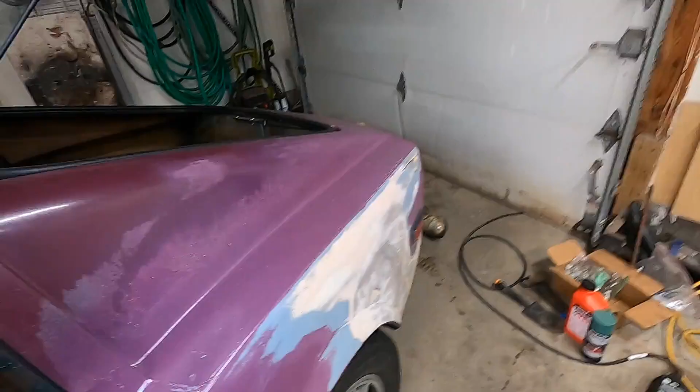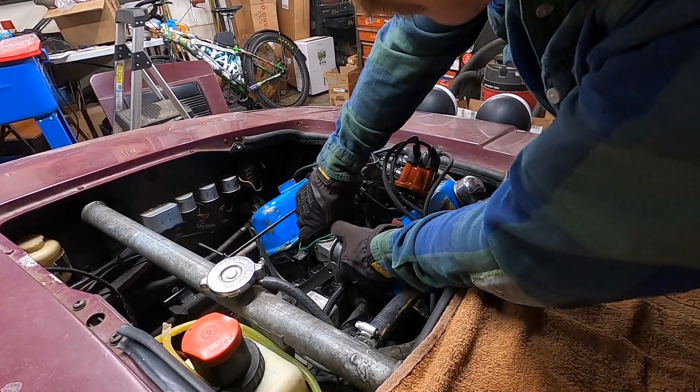Well, I'll start in the engine bay. Dad is going to replace these drain tubes that drain out of the channel in the rear window, and those are kind of plugged up right now. They come out here. He has some small engine fuel line we're going to install with little clips on it, and hopefully that will drain out of here properly instead of dripping over the edge. And it'll give me a little space to work up here because this engine bay is pretty small.

The shop installed a set of spark plug wires that do not fit. But if it runs, I guess.

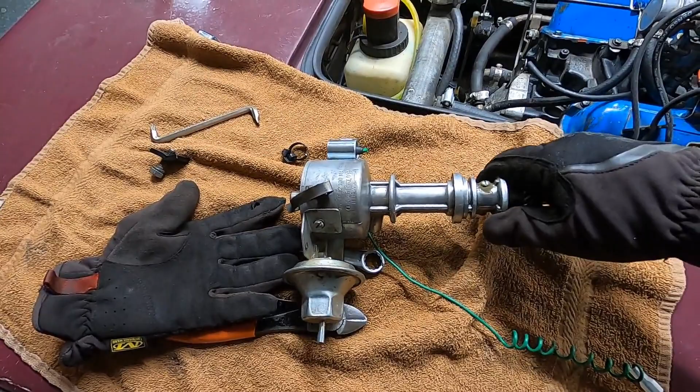To me, this distributor looks fine. It's a Bosch unit, I got it rebuilt. There is this little ground strap in here that I'm wondering if that might be an issue. I thought we checked that. I thought we checked all of this stuff.

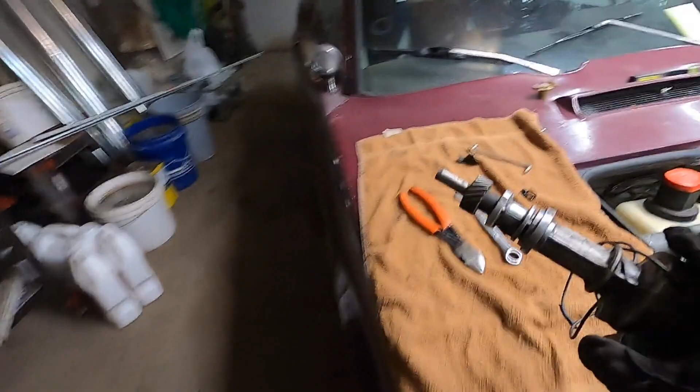The shop was saying there might be some play. I don't know if it's the up and down play they're nervous about or side to side. There's a slight amount of side to side play. So maybe one of those bushings is not quite what it should be. But we'll take this, set it aside for now.

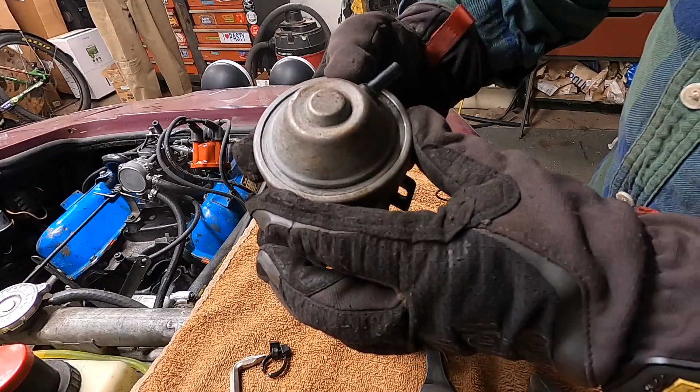And here is our $25 replacement. The gentleman who sold this to me showed me a video of him testing this, putting it on a machine and showing that spark was coming out, so I have good reason to believe that it works. When we look inside this though, we have the broken ground strap here, and I'm not sure what to do with that. I'm assuming they tested this way, and we'll see if it will work.

So I'm going to install this vacuum canister. It just sticks in there, and the lever here goes over the E-clip, or under the E-clip. And I did check that it does make sounds and all that, so I think it's going to work.

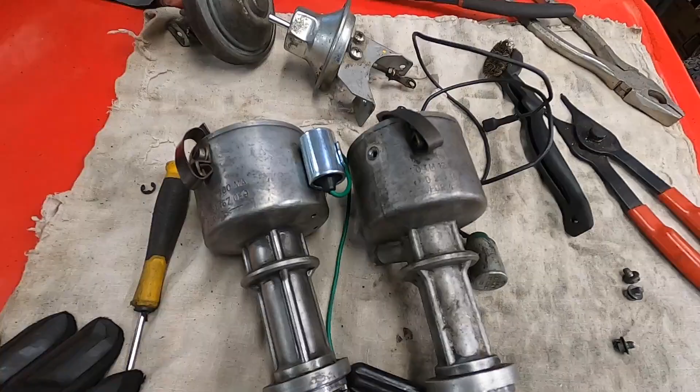Putting this thing together. So you got this out of the back of the car, and that's seam sealer that we put in to seal up the dust and sound. It's so hard to work in there, you can't even get in there. Did that break off in your hand? This broke off at where it exited the car because I was trying to pull it from the top. Wow, just pulled off from the bottom. It's fine.

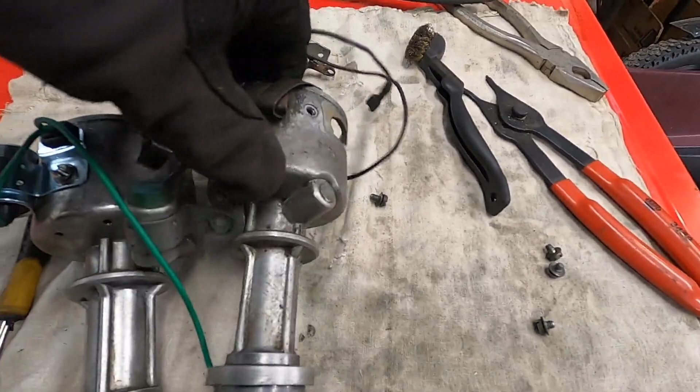So I'm looking at these, comparing that, man. They are actually the same exact part number, 0231167039. It has all the same markings on it. The difference is the condenser is a different style on this one than this. I like this condenser style a little bit because it is one piece, and this one takes a separate clip here to hold the plug in.

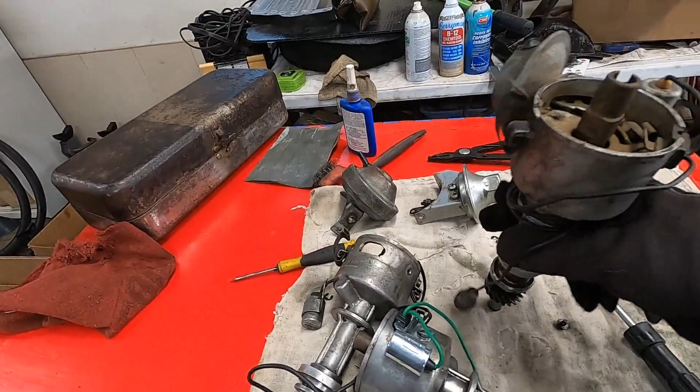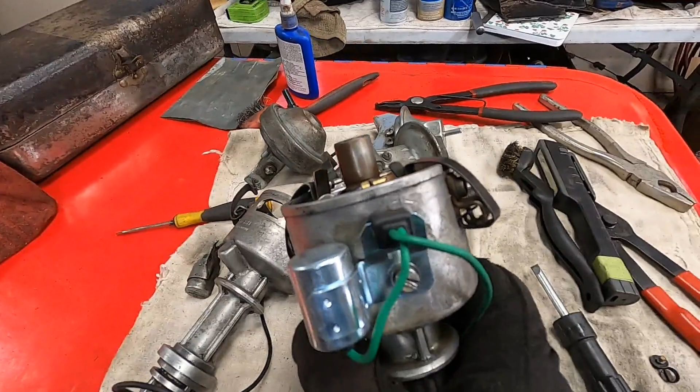They're multiplying. I pulled out the spare parts engine distributor, and I believe this is the original one for the car. You can see the condenser plug here goes in the top, cut into the side, and the cap goes over that. These other ones have it cut into a hole in the side - that's the difference. This style you can actually put Pertronix on if you want to.

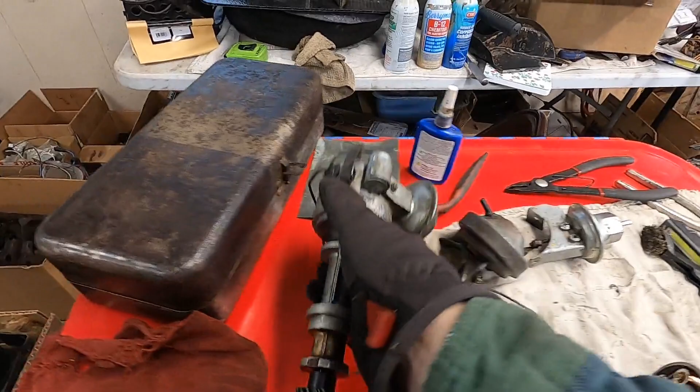I was looking at this because of that ground strap inside - we have a ground strap that's intact on this one, right on the bottom there. And this one, the ground strap is broken and flying in the breeze. That's not ideal. I thought maybe this one would have one, but no, that one is missing altogether, just gone. That's one of the main reasons I didn't use this as a test distributor - I don't know if it works, and I don't want to rebuild it just to see if it works.

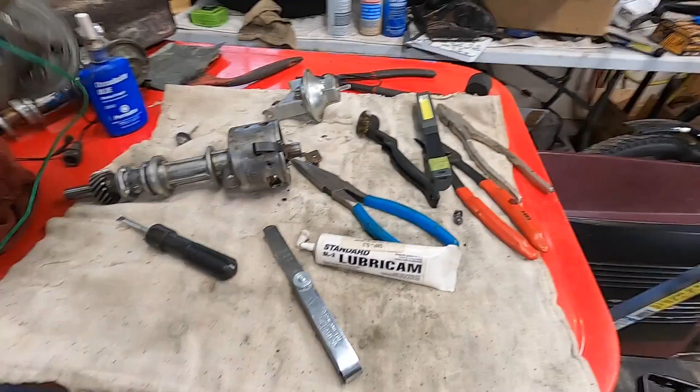So unfortunately that's kind of what I'm doing to this one. I made the decision I'm going to put on this old Advance that came with it. I'm not going to worry about updating the Advance, I'm just going to throw it on, probably throw this new condenser on it since it's the same distributor. It should fit perfectly, and we'll see if the engine runs on static timing first.

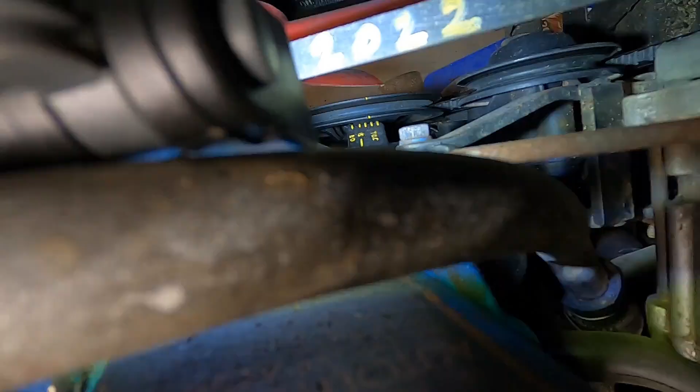All right, got her all assembled up. Got the points gap to 16 thou like in the book. Got some lube on the cam up there so it doesn't wear my points out immediately. I think we're good to put this in the car. We also had that new condenser put on - it's looking pretty good. Let's plug off that vacuum port there and throw it in the car.

Intake valve has been closed, our timing mark is at TDC. Of course, being at top dead center and putting this distributor in the right position is two different issues. You have to remember it's a V4 and the firing order is 1, 3, 4, 2, so it goes in a counterclockwise direction with the firing order, and on the distributor it goes in a clockwise direction as it runs.

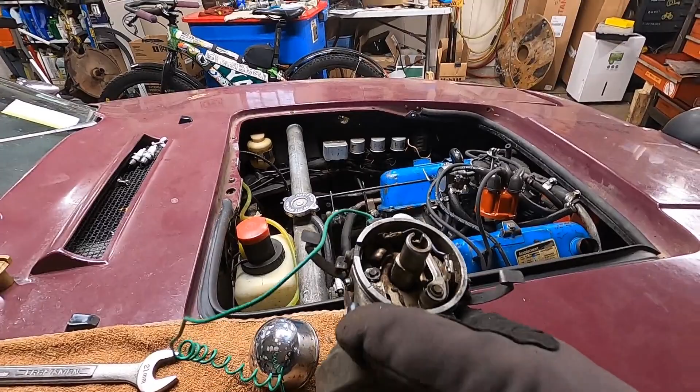If you look at the 4 posts on the top of the distributor cap, take the 2 on the passenger side and flip them side to side - that's which ones they go into in the head. Same here, if you take the 2 on this side and flip them side to side, that's the cylinders they go into. So we know that since number 1 is on the front, number 1 on the distributor will be on the back on the passenger side.

If we point our advance unit in the right direction, we'll see there's a little tick on the distributor body here, and that indicates number 1. It should get you pretty close - you'd have to put a timing light on it and get it dialed in for real.

As we put it in, the distributor shaft is going to try to turn counterclockwise to mesh with the helical cut gears. There's also that little oil pump driver in the bottom - it's going to want to line up with this, and that's a hex. So you can take a little quarter inch hex screwdriver and turn that if it doesn't go in the right way you're expecting. I'm going to try, see if it'll go in first and adjust if we need to.

Not going in. Still no. If you get it close, it should kind of pop in, but you got to get it close first. There we go - looks pretty good to me.

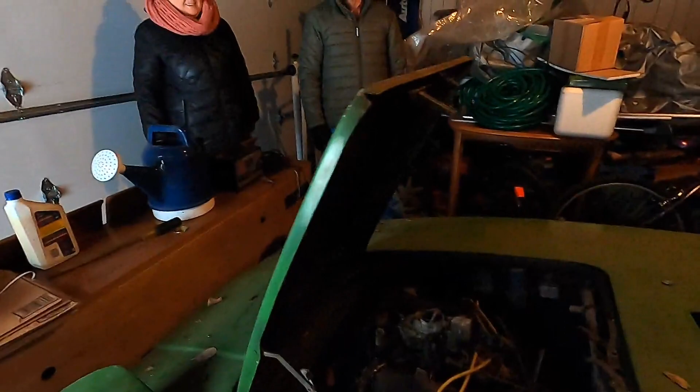So we're here at a fellow rally house, and we have a 1973 Saab Sonett that's been sitting since 1987, Kathy? Yeah, that was the last time it was registered. Her dad bought it brand new in 1973. This is very cool, it's got the SCCA Land O'Lakes stickers on the rear window. But we have a chassis that's Minnesota rusted. It's been a Minnesota car its whole life, and we have an engine here that has a distributor. I'm going to probably pull this distributor off. You might see this car in the future, but I don't think it's going to be on the road again because of the rust issues.

Anyway, we'll pull this distributor off, and hopefully this will work well enough to give us some spark and get out and drive ours. It's Sunday.

I have spent the entire day finalizing a road book for a TSD rally I'm running in a month, and I'm actually the rally master, so it's very fun.

And my dad has decided that he is going to work on the heater valve, because if we're going on a TSD next weekend, I'm not riding in this car with no heat. Neither am I. Because last year, what happened? The heater valve was stuck on, so it was heat no matter what. Well, it was below zero when we went down there, and there's so many gaps around the windows that the heater was blowing full blast, and we were still freezing. It did warm up to about 20 that day, and so it's comfortable when it's 20.

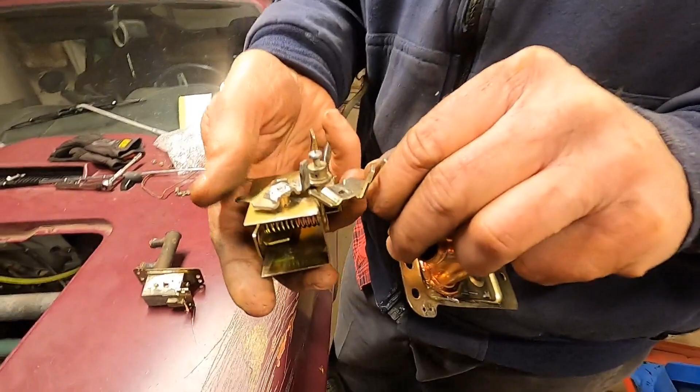The caveat is that because the heater valve was stuck on, that first year that I was driving this car, the heater was on 100% of the time, no matter if it was 80 degrees or not. So I would very much like to have a working heater valve and not have to physically disconnect it and plug it off every summer.

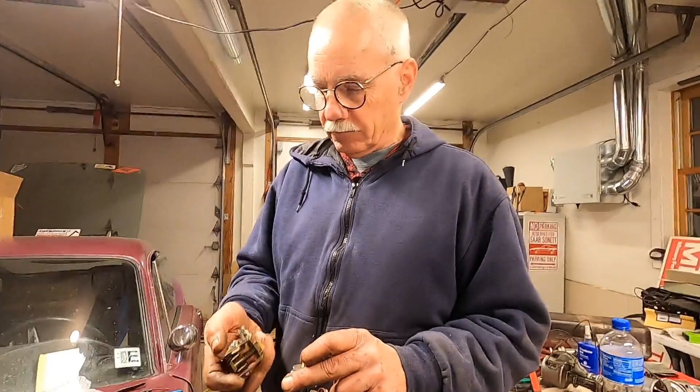So you got this part here. I thought this thing was going to be a direct swap. Well, it looks identical, but then I found out that this tab on the side of it here is a little bit different than the old one. What does this tab do? Well, the cable for the temperature goes in here and screws in. Okay, so that opens and closes the valve. Yeah. And so there was no way to hook that cable on here, and I really didn't feel like bending it and trying to get it in the right place. The cable. So I said, well, I think I can swap those two over.

So I got the new one off. I got the old one off. I put the old one on the new one, and then find out that the thing inside was backwards. So I got it all on and soldered, and it didn't work. So then I take it off again and do it again. But now it works.

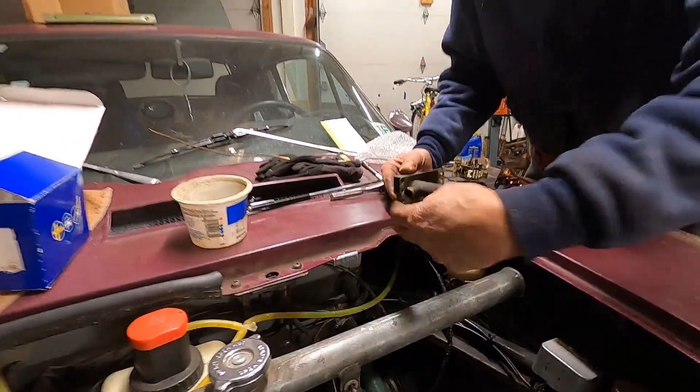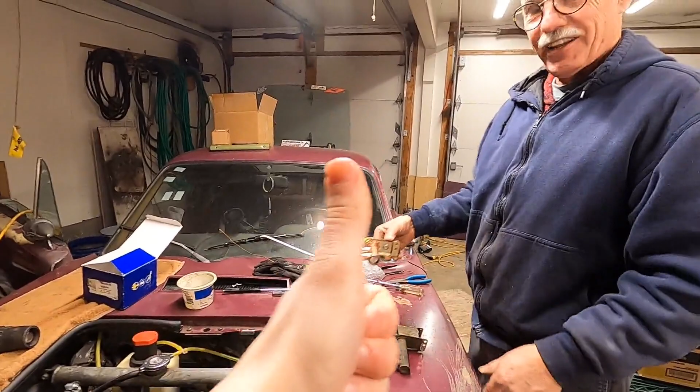So you got to thread the thermocouple up through a little hole up where the heater core is. Yeah, and it is not fun working in there because you can only get like one hand in there. So I get this valve all the way in, and I get it through the firewall, and it is not fitting right. What is going on? Why is it so tight? It normally fits in that hole in the firewall and hooks up to that elbow hose. So it's really hard to get to, right? Yeah, and it comes through like this, and then this hose hooks on there, and then the one from the engine hooks on the other one.

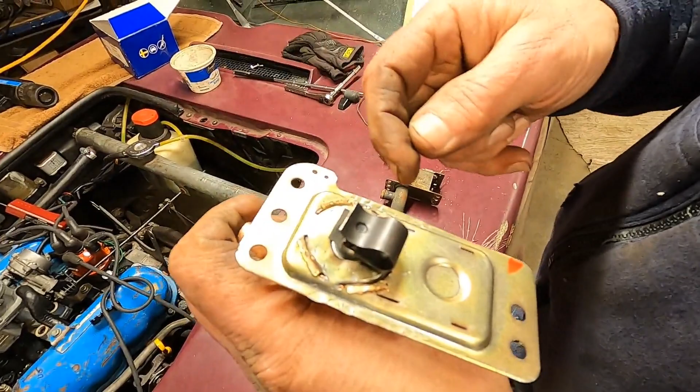What I didn't realize was, on the new one, these were turned up. So when I put it in, these were both pointing up and they were hitting on this cross member here. And they're supposed to hit sideways, but they were supposed to go in like this, right? And they came in like this. God, so then I'm going. And this is for a Volvo 142, by the way. This new one is for a Volvo, and the old one apparently - I figured that Saab would just buy the same part that Volvo bought, but no. So it is identical, they just spun this.

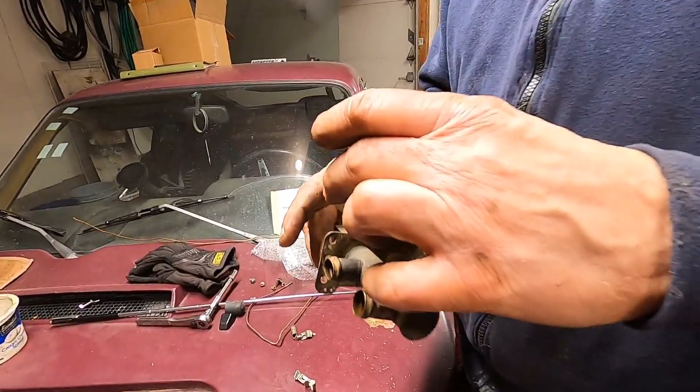So I had to bend these tabs up and pop this thing off. Let's see the tabs here. So there's holes, these tabs here. On the top? No, I'd bend these up here first. Okay, and pop this box off. And then I had to bend these tabs straight up. They're just copper, so they were easy to bend up. And you turn that 90 degrees?

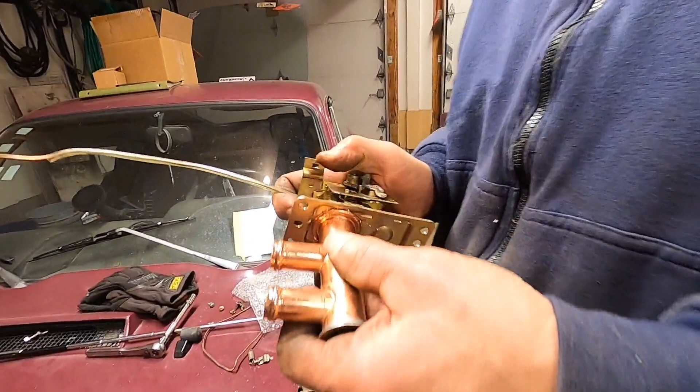And then I rotated 90 degrees, but of course it's not symmetrical, so I had to take a Dremel and cut more slots. Are you kidding me? God, I'm just not having a good day. I put it all together, but I put this thing on upside down, so I had to bend the tabs back over and flip it over. It's not going well. I should just quit and do this another day, but I want to get it on.

So now I got this on where it's supposed to be. It'll come through the firewall like this, and hook up to this hose, and then another hose off the engine, and then this is going back on here like this.

You haven't touched this, right? This is in the same orientation? Yeah, that's okay.

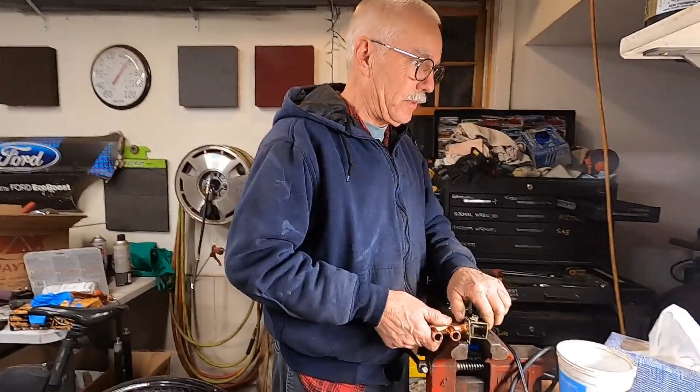I'm learning the app Rabbit Rally, it's a GPS-based road book and timing system for TSD rallies. It's pretty slick when you get it running, but it's my first time being a rally master, so I've been having a frustrating day. We ran with my rally chairman for about 6 hours, updating every single route instruction. I don't know the exact mileage, but it's probably around 100 to 150 miles of instructions.

So why did you have to do that? Did you put them in wrong? When we were turning from one road to the next, apparently the SCCA has a standard for where you take the mileage for a corner. I was taking the mileage at the start of the corner when you'd see the road sign, but what you're supposed to do is go through the corner and line up the driver door to the stop sign going out onto the intersection. So we measured all those incorrectly.

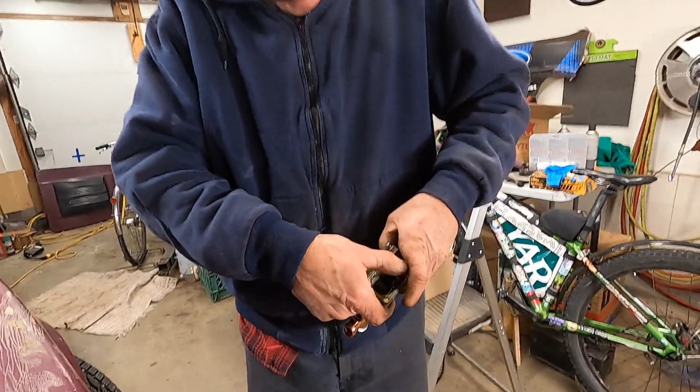Oh okay, alright let me get the old valve. I want to make sure I'm only doing this one more time. I almost had it in wrong, but I looked at the old one to make sure. So the only two things you really had to do were the little turny lever that holds onto the cable...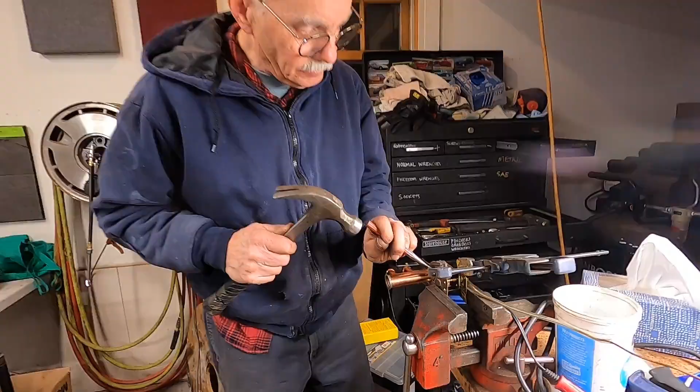And then you had to turn this thing 90, right? Yep, everything else is the same? Yep. And it appears, other than this lever, they're all the same parts. Okay, they just flipped them when they made them. So you're going to knock these tabs over again? Is that what you're doing? Mm-hmm, okay.

I started on this little project at 4 o'clock. What time is it now? 6:37.

Pop it off. This is some insulation or something? Yeah, that came on there. I'm going to leave it on there.

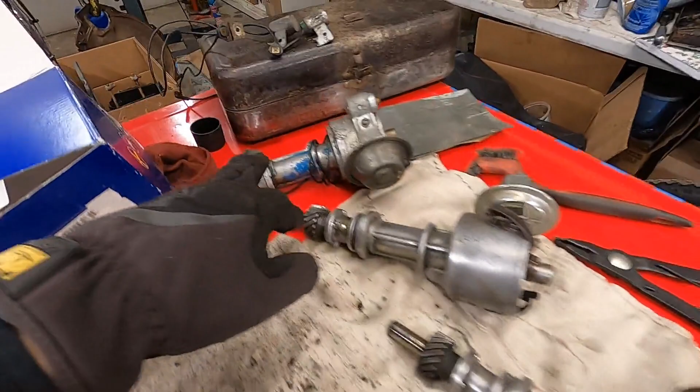So what do you think this thing does? I don't understand what a thermocouple does. Maybe the valve, when the engine's cold, it keeps the valve shut just a little bit. And then once it warms up, it probably opens the valve full. Does that make sense? Yeah. So the biggest problem is there's a wiring harness in the way.

That's lovely, right here.

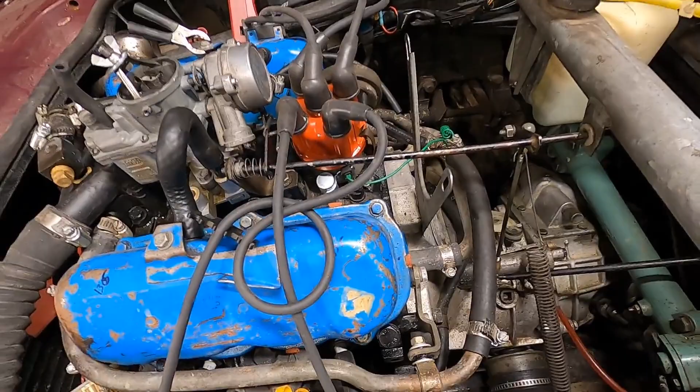Back to distributors. This is the one that was in the car that wouldn't work. This is the one I got for 25 bucks, and the ground strap is broken. This is the one from the parts spare engine, and this is missing a bunch of stuff including the ground. And this one is the one that we got in the spare, the green car. So we're going to see if this works. I did clean the points, and I checked the gap, and it seems to be within spec.

Neutral, okay. Battery on. Timing light's on, okay. Wipers off. Left side, there we go. Okay, go ahead.

Oh, work? It's not sending anything. Got a rotor in? Yeah. Oh, rotor's not pushed down all the way, dipshit. Condenser wire's gotta be hooked up, doesn't it?

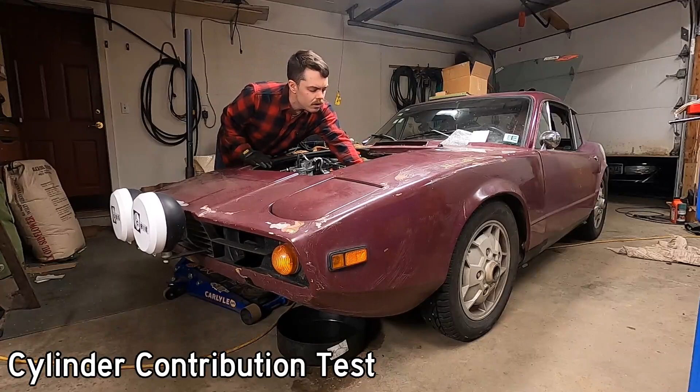You wanna go for it? Is it in neutral? All right. Sounds like it's missing one, isn't it?

Well, this is not a good sign. She cut out just like at the rally. Guess we'll go see what's going on.

Poor car looks so sad. So sad, honey. Are you so sad? We'll figure you out, honey.

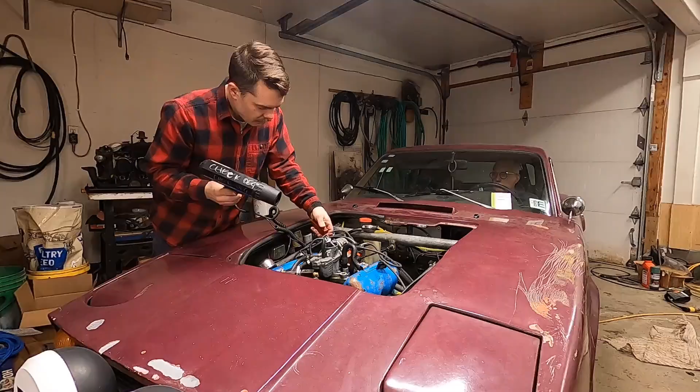I was really hoping to drive this thing to work tomorrow, but I don't think that's going to happen, not if it's doing this. I'm going to have to do a couple more test drives to make sure it's performing right and reliably. Alright, this is actually awesome news. I was out driving on the test drive and it's running great, it's ripping, I'm having a lot of fun with this thing, and then all of a sudden it stops running, just like it did in August. So now we have a perfect before and after. We tested things, we know how it looked like before. Now we can go back and test this thing now that it's not running and actually see if anything changed. So what do you want to do?

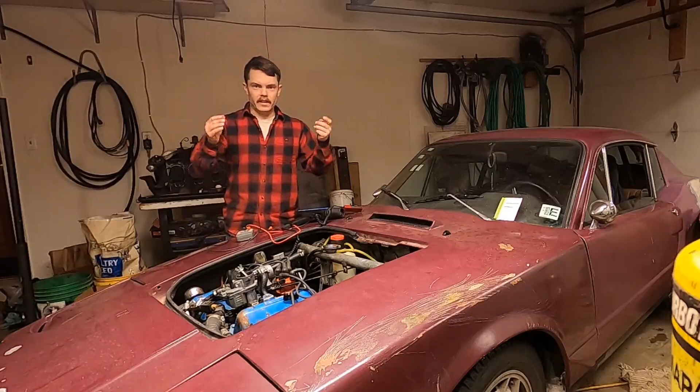What we found out is it gets power to the coil. The coil sparks, so the points are coming in and out. But for some reason, even with this distributor, we've tried 3 different distributors now, and this one has the same issue where the spark will go into the distributor but not out. Yeah.

I'm not going to be able to sleep tonight if I don't try this. It's got, the points work, the distributor works, the coil works, the ignition switch works. It's got to be cap and rotor, and wouldn't you know, I pulled an 80s rotor off that car, that green car. So let us swap the rotor over and we'll do a back-to-back test on whether the rotor is the problem.

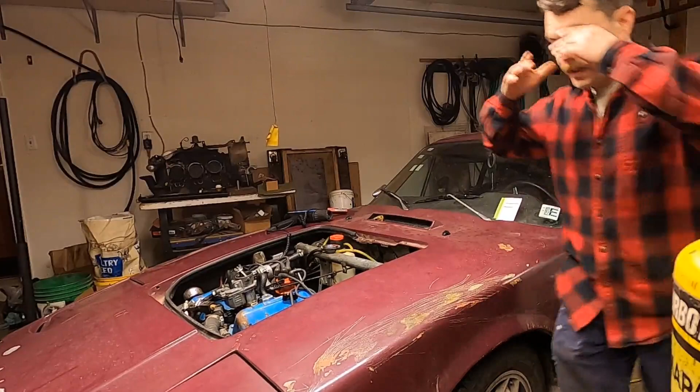This rotor was on this distributor when I pulled it.

That's gotta be it. Oh my God. It works. It runs. It runs great. What the hell? Back to back. Let's put the old rotor back on and do an ABA test on this to make sure that that really is the big issue.

This is what the rotor that it was running with when it quit. Now let's go back to the 80s rotor.

Ladies and gentlemen, I think we figured it out. Back in August, I was driving with this rotor, or one identical to it, because I've been buying Echlin parts from Napa, and the car shut off. And I think what happened is the rotor failed. I don't know how the rotor failed, I don't know how rotors fail, but somehow it failed. When we were cranking it, I think we fouled the plugs. When the plugs got fouled, any work we did to this was of no use because the spark plugs were fouled. When I was changing cap and rotors and spark plugs, I don't think I did that all at the same time last fall.

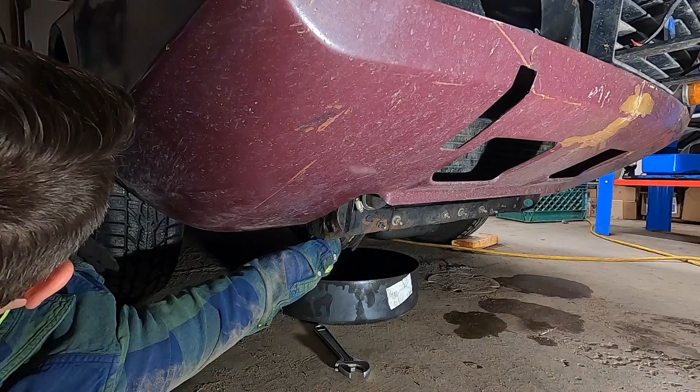It does not run on this one, as long as the spark plugs are clean. Anyway, that's enough hair pulling for tonight. I've narrowed down that this is definitely an issue. I'm going to return this to get my money back because I'm pissed off at this thing. I was super happy last night to see that this thing ran, and ran pretty well.

So with the new rotor, I'm going to take it for another test drive, but first I want to change the oil. Let's drop that out and see what it looks like.

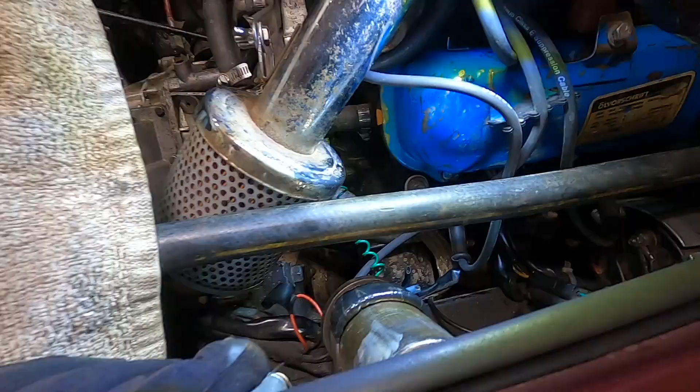Of course, I wouldn't be so worried about this, but we've been cranking this thing over a lot, and that can get some fuel into the oil. So best to start anew, and it's also time for an oil change anyway. It does kind of smell like gas.

Of course, I'm using a Napa Gold 1515 filter, which fits all my Ford engines. But it's pretty much impossible to get out of there, so we're gonna have to struggle a little bit. I'll spare you the pain, but yes, these things will fit a Sonett. You just have to push the coolant hoses out of the way to actually squeeze them out of there.

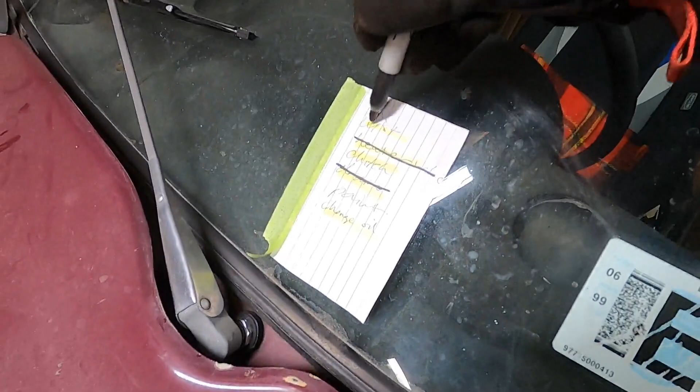Last May, I pulled the engine out of this and put in Amsoil Z-ROD 10W-40. I like it, I'm gonna keep going with it. It's a full synthetic zinc classic car oil. I think they guarantee it for like 5,000 miles or 2 years.

I think it's time to take this thing for a test drive. It's dark out, unfortunately, so we can't get that good of a video of anything, but hoping that everything's gonna go okay and we can drive around for a couple miles, just do a couple loops around the neighborhood and come back in, make sure it's ready to drive to work tomorrow.

And I need to do as many shakedowns as I can this week before the big rally, so we're not down in Winona getting stuck, because that would really suck. It'd be kind of like Ojibwe all over again. So let's go.

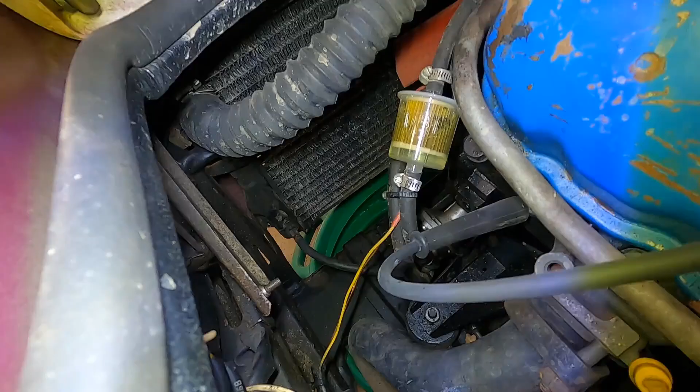Well, I drove it to work today and no news is good news, so we're going to work on that heater valve, get that hooked up so I have heat in the car. We got to drain the coolant first, and I think my dad's going to work on hooking up the tachometer and all that ignition wiring that the shop unhooked when they were trying to diagnose things - turns out it was actually the rotor.

Thankfully able to throw a rubber hose on there. That's draining out pretty quick now. Well, not quick - quick as the petcock will allow.

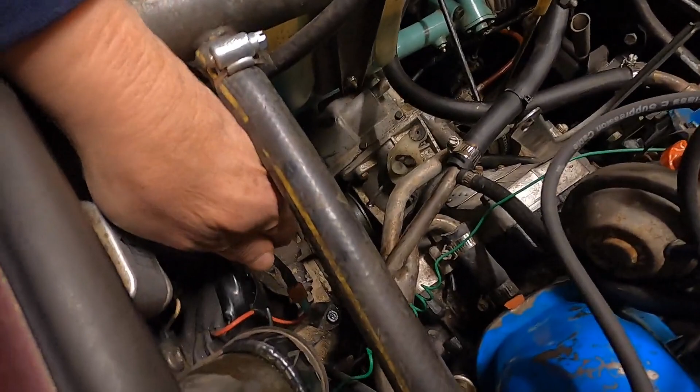Dad's over here working on this wiring. So I ran 2 wires in from the coil, and apparently the shop cut one off. So I guess he's gonna put a spade back onto that one. It's just small stuff today.

Okay, we just filled it with coolant, and we're running the engine to see if we can get it to circulate around a little bit.

And we just got the cutoff switch wired up here off the coil. Here, gonna flip the switch.

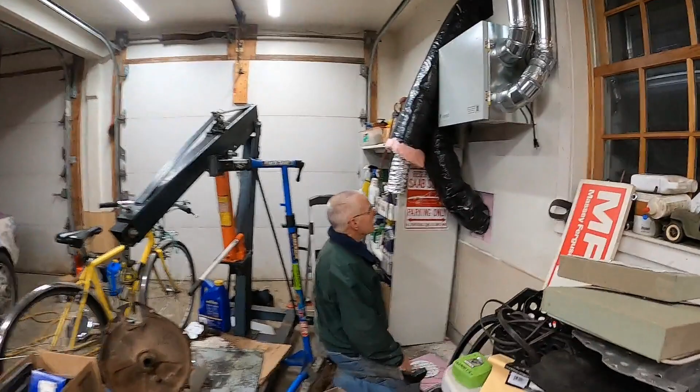Oh, it works. Works like a charm, and it worked on startup too. So what I've been doing here is I turned the heater on all the way hot so we can circulate through here. We also have a drain petcock here to bleed out of this, but I don't think we're going to do that tonight.

We're both pretty tired tonight, I'm pretty worn out, so we're going to go in and call it a night for tonight. It's Wednesday night, and I'm feeling pretty good about the car for Saturday, but there are still a couple things I need to do.

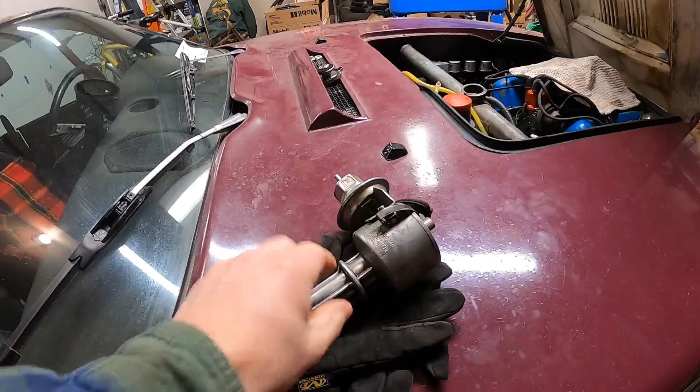Dad's also doing some stuff over here, so don't mind him. He's actually installing a heat exchanger to control the humidity in here.

I know the car runs pretty well, but I'm going to update this and take the parts distributor out because I don't think the vacuum advance is working very well. Well, it's working, but it's not quite dialed in. I'm gonna put in the Mark Ashcraft rebuilt distributor. I thought it was bad. It's not bad, it's the rotor, I believe. So we're gonna swap that over and then we'll try other stuff.

I got the rebuilt distributor put back in with a new condenser on it, so that is ready to be timed up with the engine. But I'm gonna wait for my dad to get done with his little heat exchanger thing before we do that.

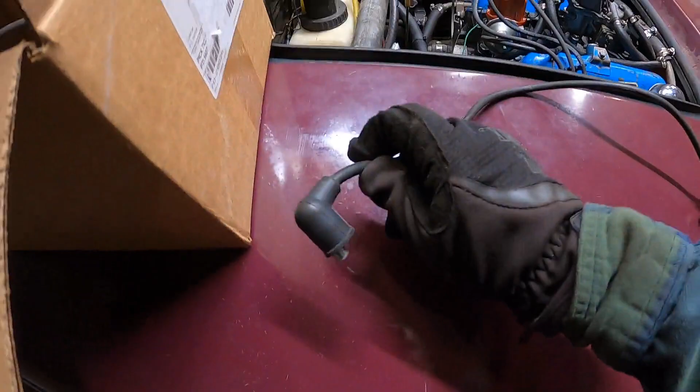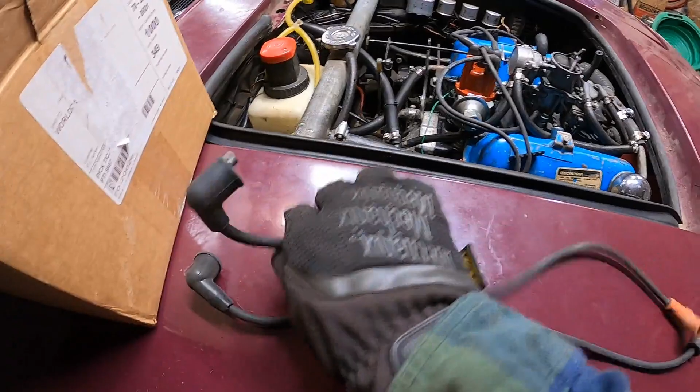In the meantime, I want to replace some of these spark plug wires that the shop put in because I don't like how they fit. You might be able to see down there the spark plug wire actually is pushed up against the edge of the alternator, which is not ideal for a few reasons.

We're gonna put this one back on that I made. It's got the 90-degree on one end and the regular cap on that end. So we will put this in, we'll compare them here. So here's our one that I made custom for the job on top, and if we take it down, it's a little bit shorter, and it's got that 90 degree. So that's what you want for the number one. All the other ones can be the normal, if you cut them the right size.

I actually had to custom make my plug wire set because I could not find any available for a reasonable price, and thought that would be a fun thing to do. So it's not too hard, just crimping is a little tricky sometimes. So we'll put that in and we'll time this thing and we'll move on to something else.

Are you kidding me? You gotta be 180 off. Why? It's the same distributor. How can I take one distributor out, the same part number, replace it with the same distributor, same part number, everything, put it in, and it's 180 off? You can't even see the mark on there.

All right, so I got the distributor put 180 around, made sure the vacuum advance is unplugged so we get an accurate reading, and we're going to try this again.

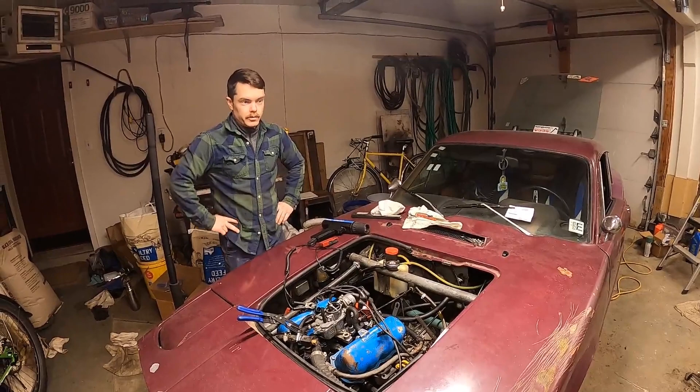Did I just say that? That was supposed to be a secret.

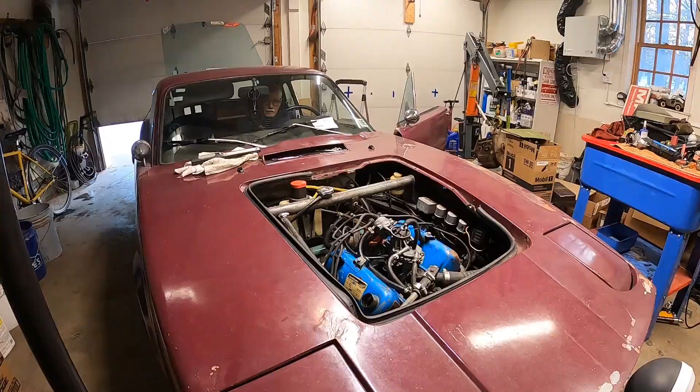We put the parts distributor in the same orientation as the rebuilt one, and I just lined it up as best I could, put it on, and it was running about 10 degrees advance. I just took it to 7. It ran great. So there's something weird about the Ashcraft distributor. I'll have to either get a distributor shop to test it and see what's going on with it, or maybe send it back to Mark. I don't know, it's weird.

I did rotor testing. The rotor obviously is bad on the Napa rotor I was using, but I don't think that's the end of the story. So we're gonna run with this one for now.

I wonder if I need to adjust that a little bit. Seems like it's... sounds like the timing is a little bit retarded. Yeah, it's running rough.

I think what happens is I put my old spark plug wires back on, and I think one of them's probably missing. Oh, I think that makes more sense than the timing, because the timing's on.

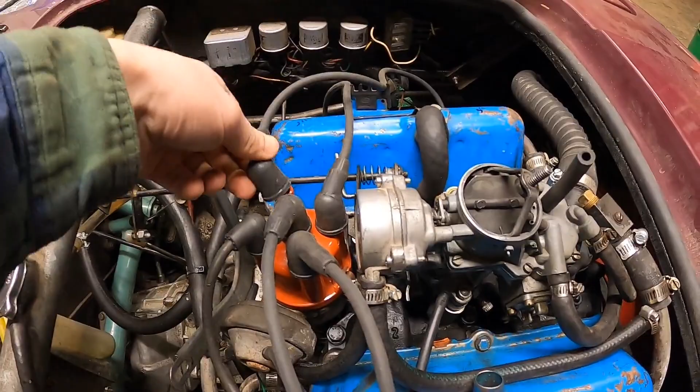All right, we saved number 1 because I have that nice elbow in there that helps it fit on easier, but we replaced all the other plug wires. The coil wire has also not been replaced. So let's try it now.

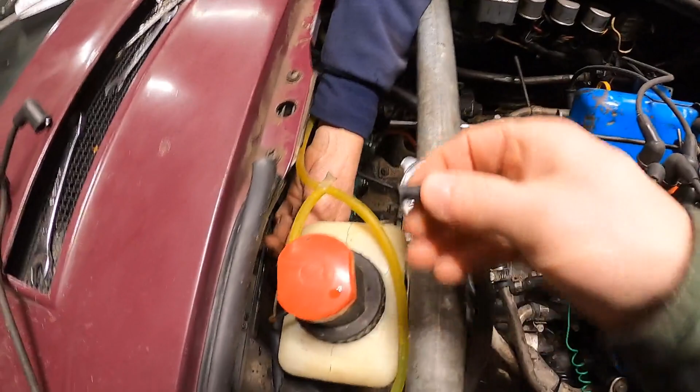We still got that ticking noise, you know. An exhaust leak can sound like a valve train, so I'm not too worried about it. I know I did kind of a sketchy job on the exhaust because I'm not a very good exhaust fabricator.

We got this thing going. That goes on the end here. We got this little vacuum plug that I put on the end, that's just to protect it a little bit. I also have a little cap over the bleeder for the clutch, and that's a brake bleeder cap, just to protect those. Rev it up a little bit.

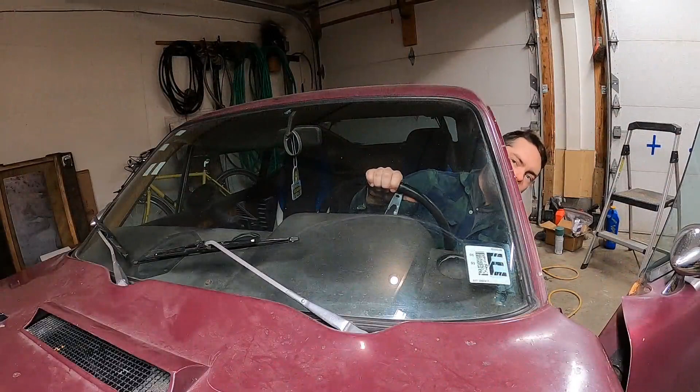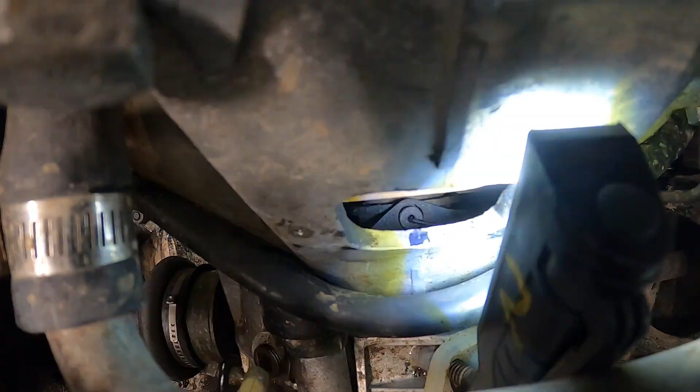The next thing I want to fix has been bugging me for quite a while now. It's actually the clutch linkage - the clutch release lever, and that actuates the throw-out bearing and pushes your clutch in and out.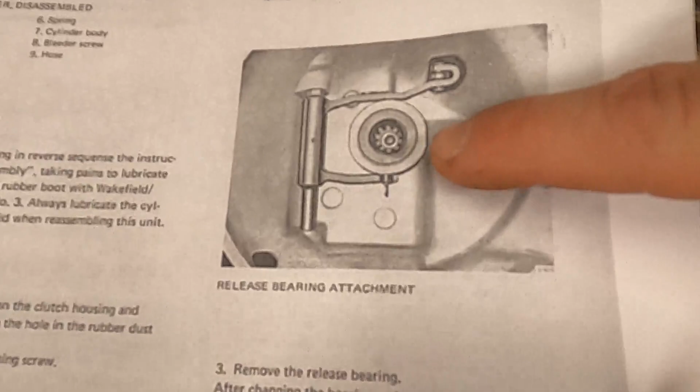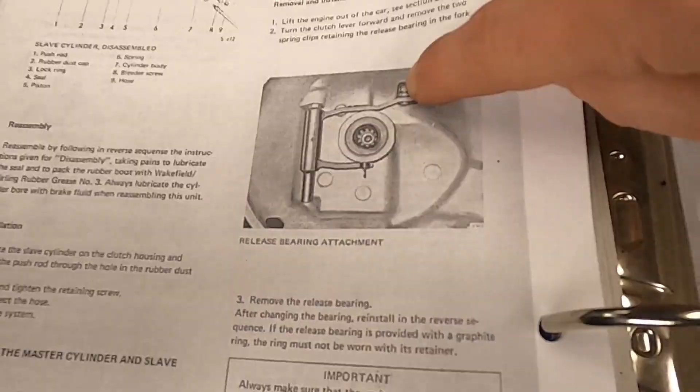Over here we have the throw-out bearing, and that's the bearing that touches the pressure plate and pushes on it, so it kind of rides on the pressure plate. Here's our lever that connects to our slave cylinder - it pushes in, pivots off this end, and pushes this in and out. If you imagine this staying in place and this moving, say, 2 units, then this would move 1 unit, giving you a little more leverage on the pressure plate.

I think we might be able to grease these pivots here. I'm not sure if we're going to be able to get anything into that, but it might be something worth trying.

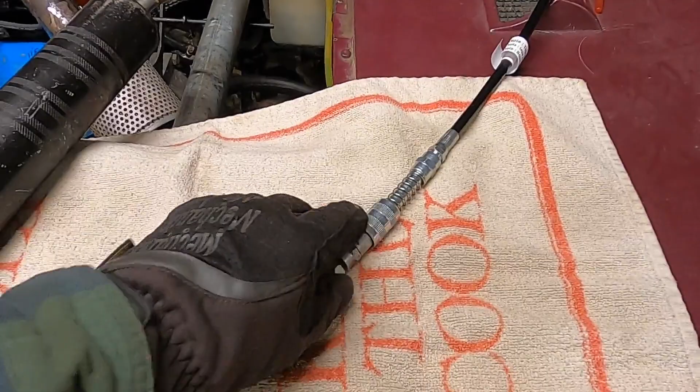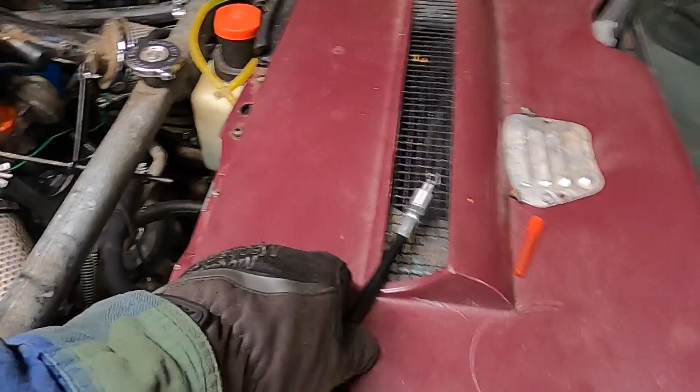I was over here brainstorming ways to get grease into that little tiny pivot, and what came to mind was this little tiny brush, almost like a makeup brush. I thought I might put a bit of grease on it, but couldn't find that. So I remembered when I was doing the Corvair wheel bearings, I had to buy this ridiculous needle greaser - like a hypodermic needle on the end of a grease gun. It just clicks in with a little zerk fitting, so you click it into your grease gun and can shoot grease into tiny little crevices.

It's probably a two-person job to hold this and aim that and squeeze it. We're gonna try to get this thing in there and see if that'll clear it up. We should also be able to get in a little sideways, not just straight down, and maybe get grease into the other pivots instead of just the one.

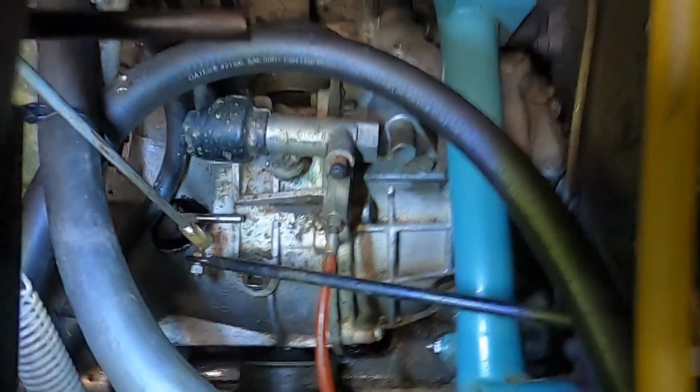If I turn it, I can get the hex in there. Give it just a small pump and see what happens - half a pump. See if this thing actually worked... I guess not.

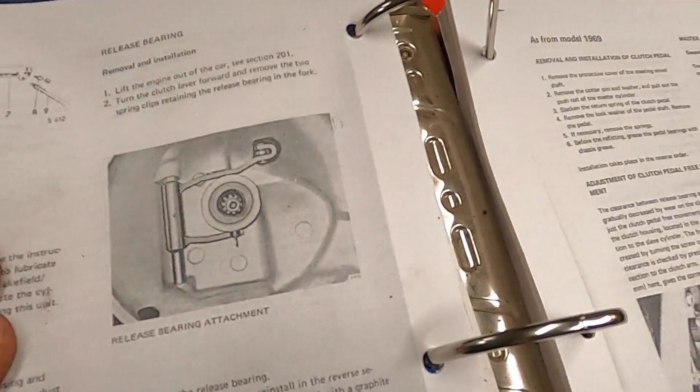Got the slave cylinder out here - it's just one bolt on the end, so pretty easy. Now I'm looking at the thing the slave cylinder kind of sits in. There's this little pin, and the pin sits in a bit of a yoke here. We're gonna see if we can get this pin off the top, pull this thing out, and then we can grease that. It's got some play too - could probably use some attention.

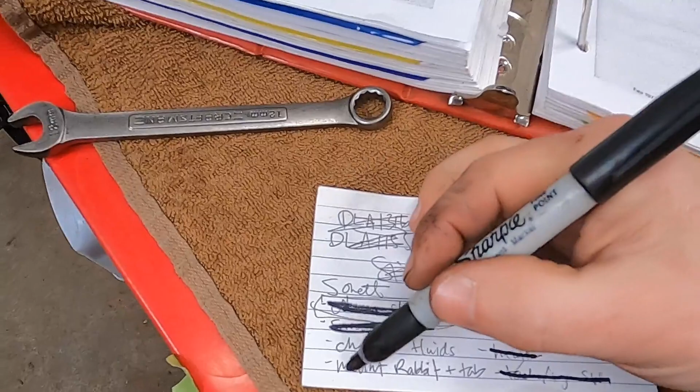Well, I've lubricated this the best I can, and this the best I can. This one I can't get to, and this one I can't get to. So I think it's either this one or this - probably the big one on the side. I'm gonna have to live with it until I pull the engine out again.

So what do we have left here? The clutch - I couldn't get it to work. I was going to put some spare rear springs in to see if it would ride a little higher, but that's not going to work.

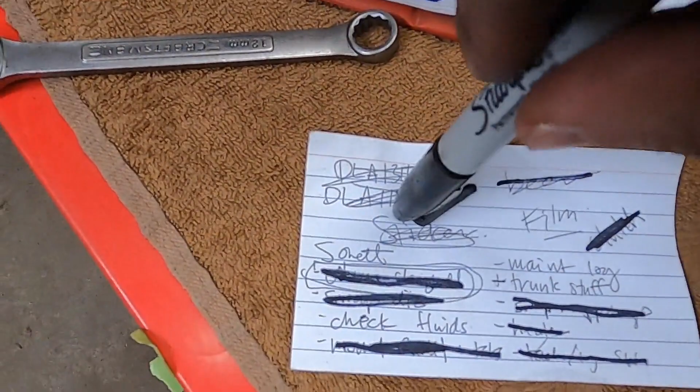We've got the Rabbit mounted and tablet will be fine. I've got to update the maintenance log tonight. We've got to go through all the stuff in the trunk and make sure we have the full set of spares, tools, liquids, and all that stuff. Then tomorrow morning I'll check the fluids again. We already know the engine oil is perfect and the coolant is very close.

That's about it for now. I'm going to drive it to work tomorrow - the second time this week. Don't want to put too many miles on it in the salt, but I've got to shake this thing down before we go on the rally. In case anything else pops up tomorrow, I want to be able to take care of it instead of being stranded a couple hundred miles from home. So let's get that done. Should be okay, and we'll see you tomorrow - tomorrow's Friday, rally's on Saturday. It's coming down to it, so gotta get this thing done.

All right, the drive to work and back went pretty well. I took it on some back roads and really tried it out. Seems like it's gonna work.

There's one little thing, it seems like it's kind of lagging, like it doesn't have quite enough power, so I'm going to try to bump up the initial timing from 7 to 8 degrees and see if it'll get that power back that I had on Tuesday.

Otherwise, we're going to double check a few things, double check my fluids, and we'll double check the tire pressure and all that stuff, go through the engine oil, transmission, coolant, brake, and clutch fluids, get all those done.

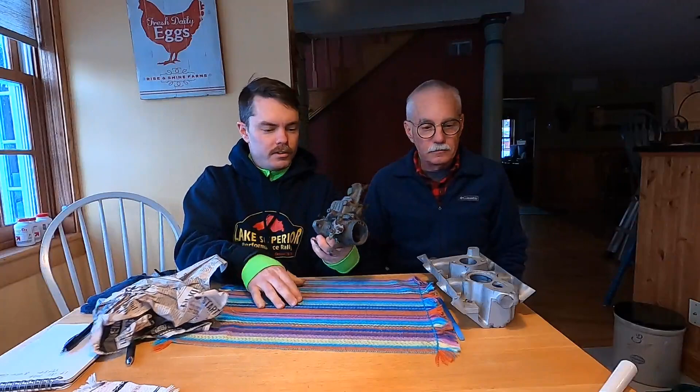Interesting, I needed a new intake manifold. Why would I need that? It's cold. Oh, that's a Weber 34 ICH carburetor. Very nice. Oh yeah, I'm going to a Weber, so should be fun. It looks a lot higher than the other one. Yeah, anyway, it's a one barrel still. For some reason I thought I was getting a 2-barrel, but yes, 34 ICH is a 1-barrel. The 32/36 I think is the one that people use for a 2-barrel. So that should hopefully, once I get it restored, solve my fuel leak up on the carb.

Is that an electric choke? Oh, looks like it is. It might run a little better when it's cold if I can get that rebuilt right. So we will update this with another video, so keep on watching and we'll get to that.

As a second epilogue, I just got another thing in the mail. One of the issues that I had, we got lost on one of the later stages, and it was really dark out. Should have taken a left, and we went straight, and I had to back up, and I could not see anything behind me.